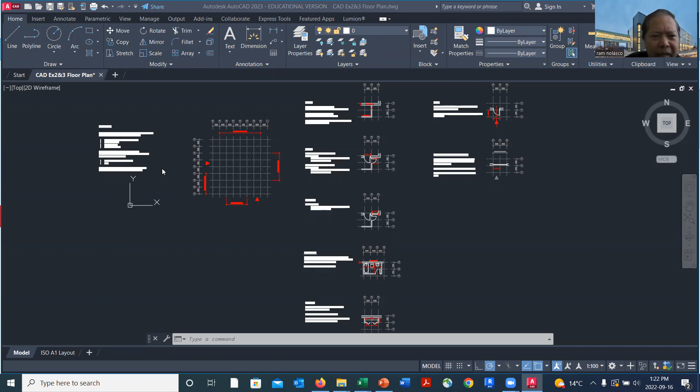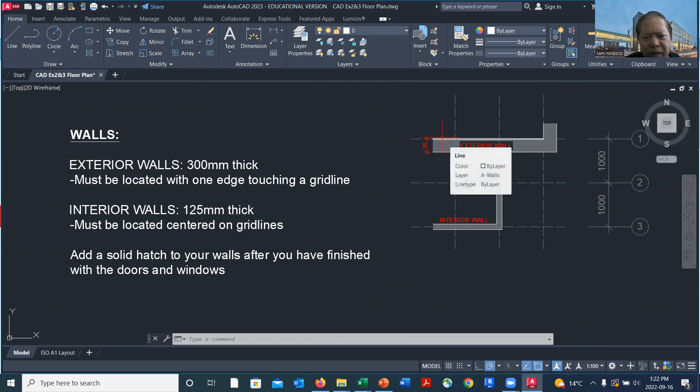Okay, so what we want to do is create a schematic sketch of how our floor plan would look like. Same instructions for the walls: you have a 300 millimeter thick wall, and for the exterior wall, it should be on the grid, with at least one edge touching the grid line. For interior walls, it should be placed at the center of the grid.

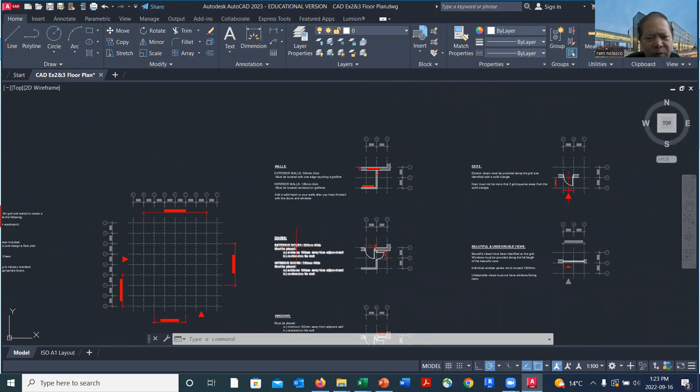And we do have some requirements here. One is for the entrance. And of course, if you have an entrance door, there is a minimum of 100 millimeters distance away from adjacent wall. Likewise, we have instructions for where to place our windows.

So how would our floor plan look like? Well, for one, if there's an entrance here, let's say I'll place my entrance here, I cannot place a wall here because my exterior door is 960 millimeters wide. If this is 1000, that leaves me with 40 millimeters, and remember, I cannot place a wall beside the door.

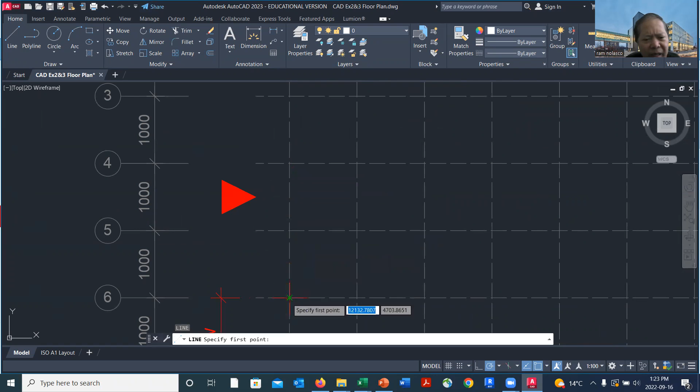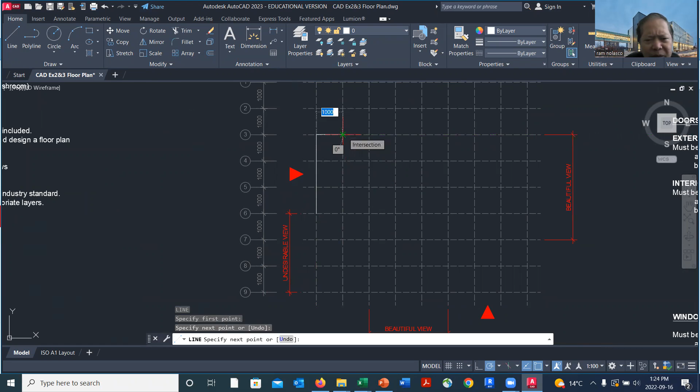So that means if I have a door here, I might only have a wall after the opening. So I can place a wall right there. Maybe I'll do that - I'll place a nice entrance right there, and then maybe place my wall here.

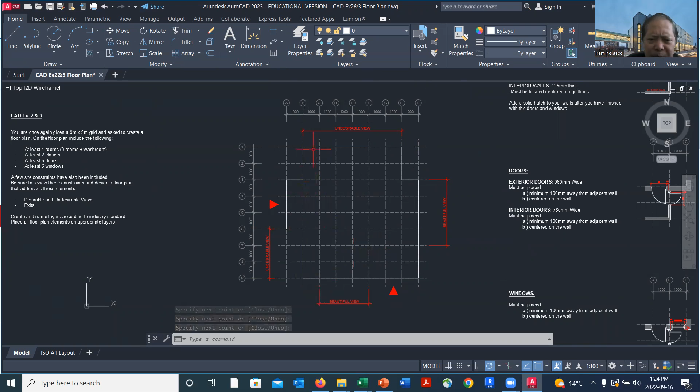Maybe this will be my initial point. Okay, maybe I'll place a wall up to that point and close it here. So I'm thinking of this configuration for my building footprint. I can further extend that later, but for now, that's where my walls are.

Maybe I can also place one here, a line here. And maybe trim this, to emphasize my entrance - that's something I like to do. So I can trim this, trim that, and delete this.

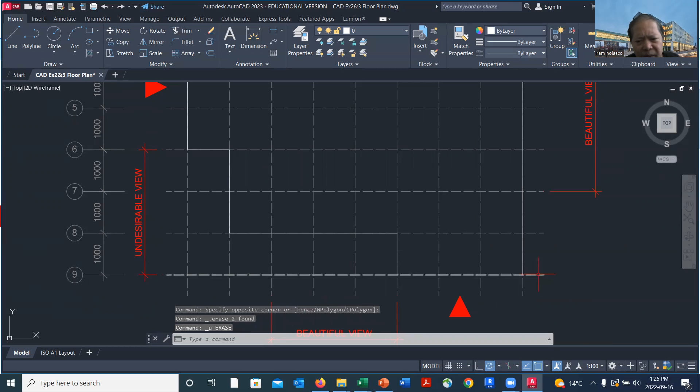Select and delete - oops, I think the grid line got deleted. So just select this and delete. Somehow the grid line is not locked, so I need to lock that grid line so it doesn't get moved or deleted.

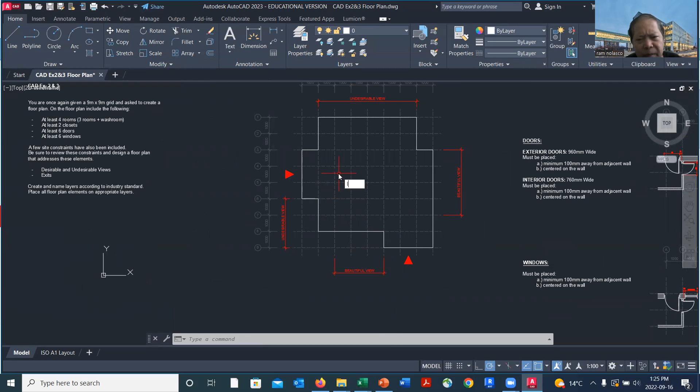Okay, so I think I like that initially, that will be good. I'll have a door here, and then maybe I can have a line here, so maybe that could be a couple of rooms. So maybe a line here, so that can be a room right there.

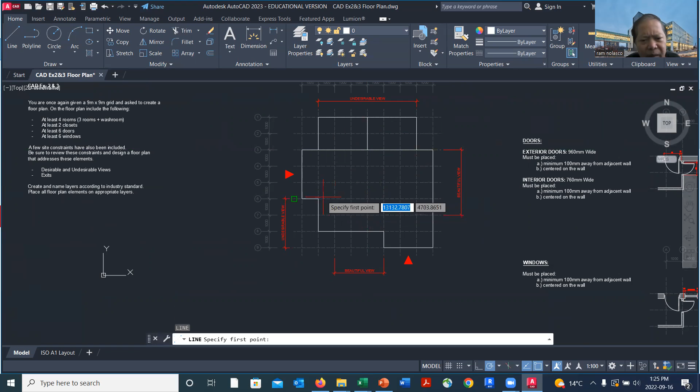And then maybe I'll have several rooms here as well, so I can place maybe another room here. I do need six - how many rooms? Four rooms. So right now I already have one, two, three rooms, and then maybe I'll place another right here.

Okay, maybe I can place one right here. So, line. And if I want this to be open, maybe I can place a room right here. Okay, just 1 meter too close, maybe something like that. So I now have four rooms, and maybe I'll place something right here - maybe the powder room here. No, I do have the entrance.

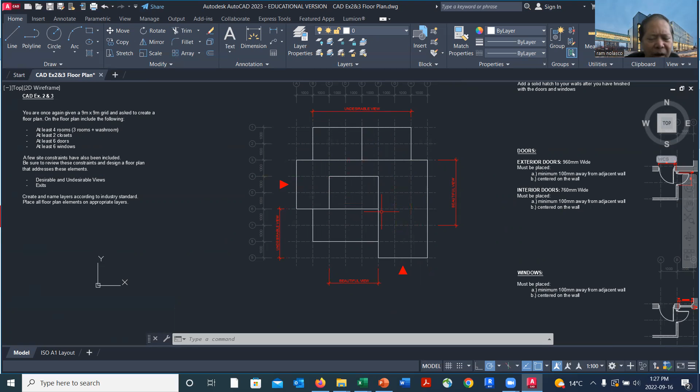So the first thing you want to do is create a sketch, so you can easily change and rearrange the rooms - you're not yet committed to where they will be by simply creating lines. Create a line, try to figure out what your final decision will be, but just create lines and make sure you comply with the requirements.

So create a schematic drawing of your building footprint or floor plan, and once you have completed that, then you can place the wall thicknesses and the doors and all that. Okay, so create a schematic drawing.